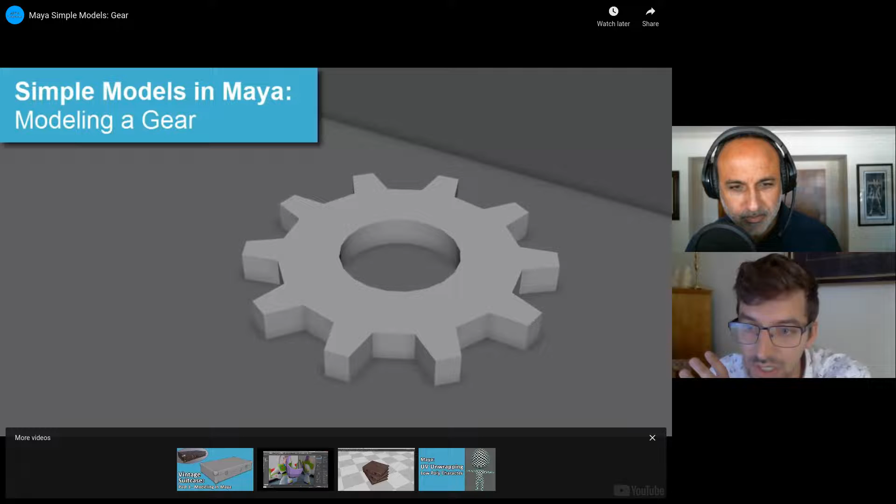Rather than opening Maya and doing that myself, this is a video online, not my video. It's a video from ARTV on YouTube. They have a nice little tutorial on how to model a gear. We don't need to watch the whole thing, it's 8 minutes long. I'm just going to skip through it so we can get an idea of how you'd do this task in a traditional modeling software.

Probably drop down a cylinder, right? You go around, and if you want to bevel it out or carve out a hole on the inside, they're taking out the inner faces, bridging it. Then to get to the actual teeth part, they're going in to control their number of divisions, shaping the inside. Here, they're choosing the size of the inside of their hole.

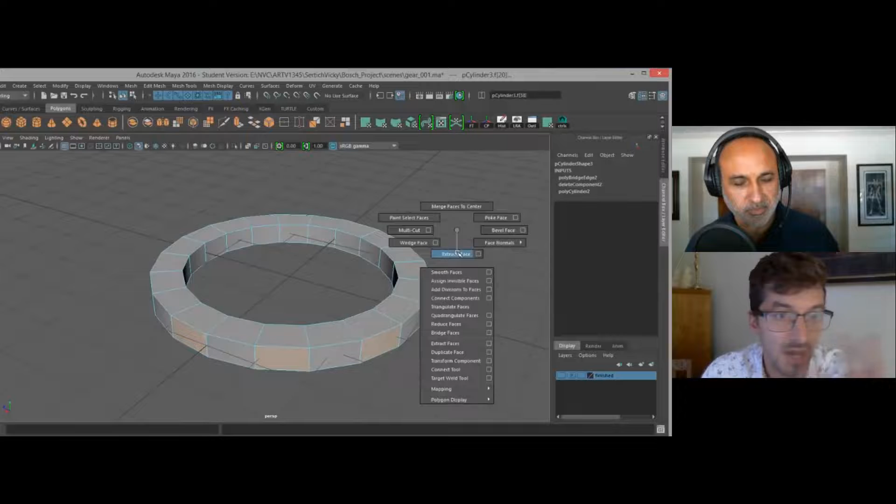Once they have that the way they like it, they go around the edge and manually select each of the faces they want to extrude out into those teeth. So they extrude those out. This is probably very familiar for everyone comfortable with Maya, but good to see because we're going to see how we can do this more easily in something like Houdini. Then you extrude all those out and maybe set a little inset on them, and then you've got your basic gear. Let's say that's all we want to create.

So let's take a look at how we would do that in Houdini now. I'm going to share my screen, let me make this full screen, here we go. Can you see this, Frank? It's coming up now, there you go. All right, cool. So let's say that we want to do basically that same shape, right?

When I hit my tab menu, it comes up on my other screen unfortunately. So normally what I'm doing here is I'm hitting tab in this space right here, and normally it would bring up a drop-down menu of options to choose nodes from. That doesn't seem to be popping up right now, so I'm just going to drop nodes. But if you get comfortable with Houdini, you'll understand pretty quickly what's happening there.

So I'm going to drop down a circle. I can, Houdini has a lot of... you know what, Frank, sorry, one second, I'm going to pause this. I'm going to switch the screens I'm sharing so that... sure, no problem.

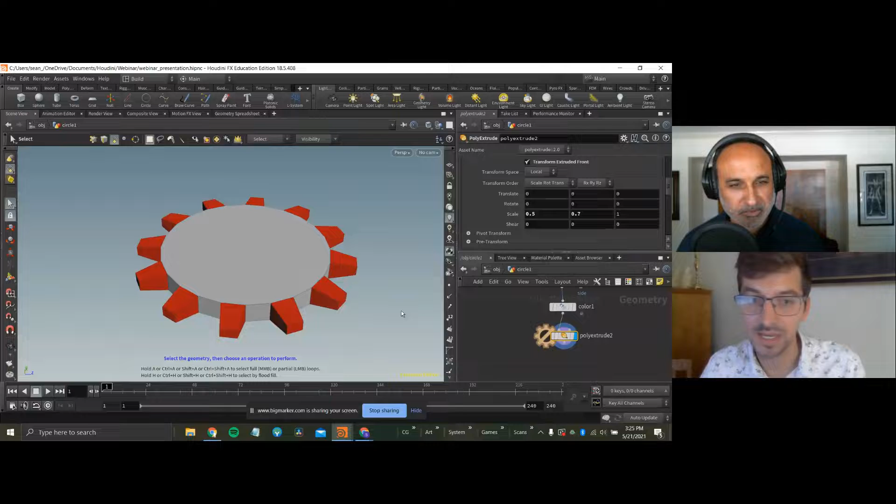So now I can drop down another Poly Extrude and extrude that group as my input there, like that. Then you have local controls to scale it down if you want to, something like that. And if we want to smooth it out a little bit, maybe I want all of these hard edges to be beveled.

We can procedurally group all of the hard edges. I'm going to put down a group node, tell it edges, and call this corners. I can tell it to group by the angle of the edge of the faces that create the edge, so I can say if it's between maybe like 70 and 90 or something like that. Let's get just the outer edges. So you can see as I adjust these sliders, it lets me control what gets selected.

Let's say I want to bevel all of that. If I put down a Poly Bevel node, it automatically filled that in because I had them selected, but I can tell it to bevel those corners and we can start to soften up edges there. I'd be painstakingly selecting every edge to bevel in Maya.

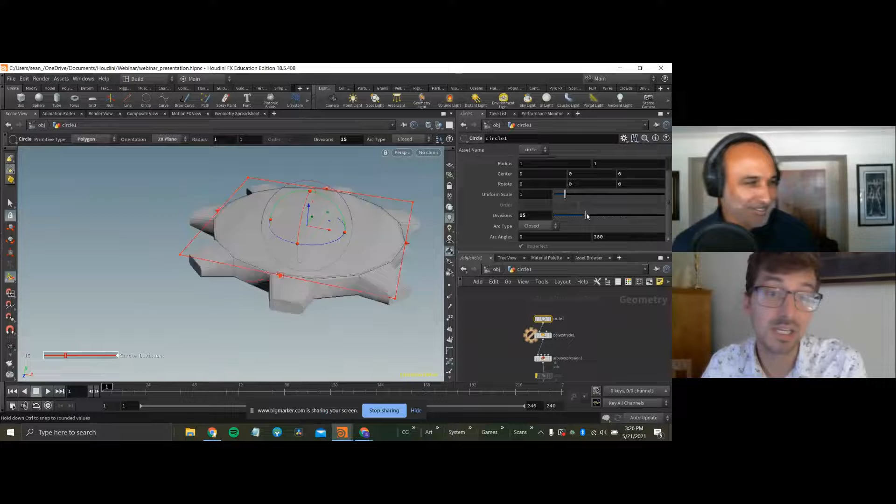What's cool again about this is at any point you can modify the number of teeth, change the scale of your source points. Normally I'd be naming all these nodes as I go along so I could keep track of what's what. You can change the size of your teeth that's being created.

And if I want to carve a hole in there, I could put down, simplest way would probably be, a tube, give it some end caps, make it really tall, and then just boolean them out. You can do another thing after this step to bevel out this boolean, but let's just do this for now. That's probably going to be too big because I need to change... there we go, I've got a hole cut in it.

I could do another procedural grouping of that edge, bevel that so it's softer on the inside. I'll just copy and paste this even - anything with the hard edge, there we go, get smoothed out again. I can add more divisions to that.

Cool, so now we've got something pretty darn similar to what we had before. And something that's cool about this too is if I know this is something I want to use all the time, I can create a little control node for it. There's a node called a Null Node - it's basically just nothing, and you can edit the parameter interface of it, which means you can customize the parameters that pop up there. I'm going to put down an integer called number of teeth.

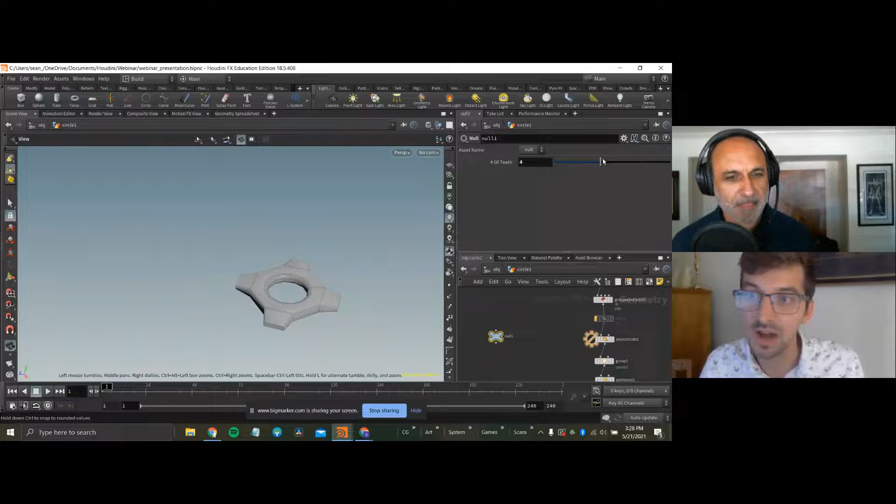I could then go over here and add all of the relevant controls that I think I would use. So I can go on my circle, I can set the base scale of it, I can set the scale of the inner circle, I'll call this outer scale. And this is the name that appears to the user, so I'm gonna give it a prettier name: outer scale, inner scale.

And then you could even add all of those bevel controls on there. Maybe let's just add one more thing: the length of the tooth extrusion.

So now directly from this single interface, I can control how many teeth I have on this gear, I can control that outer scale, I can control that inner scale, I can control the length of those teeth. And so if you need to create 50 different gears, you only need to build this setup once, and then you're just controlling your build here.

Next, I want to take a look at how we might build a little road setup, because this is kind of cool since we can scale a few things on it. With this, we're going to take a look at a couple of simple things and then a couple of slightly more advanced things as well.

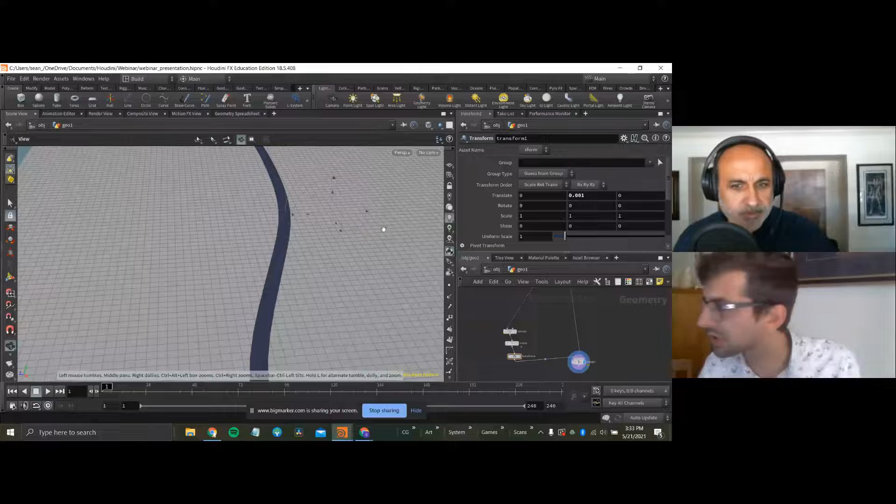So let's say that I have this curve and I want to go back and modify it. This draws it as a poly curve, but it'll be a bit easier to modify this as a NURBS curve. Okay, it's doing that because of my viewport settings here. Let me fix that... yeah, there we go.

So let's go up to our curve again. I'm actually going to resample this down even more so that we can convert it to a NURBS curve, which will be easier to do some post modifications on. So we're going to do that, and then I'm going to need one more because it needs to be a poly curve when it goes through these whole operations. But this gives me a point kind of in the middle here. So I'm going a little bit off book here, but this will be an interesting thing to see.

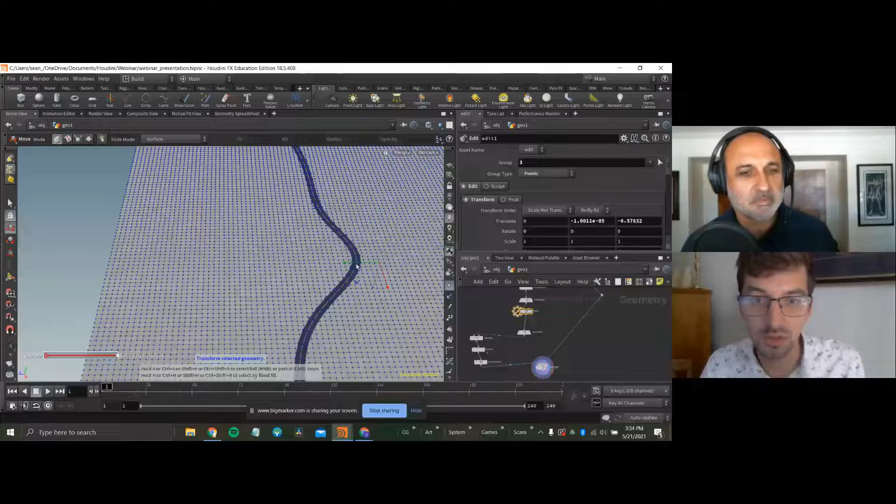So if I go down here and visualize this, and then we go up to this node—or actually maybe I'll go the other way around so we can see our points a little bit better. Now I can go here and select any of these points, shift them around, and we can see that that road just automatically gets rebuilt based on however we decide to reposition this curve here.

So let's say we like that. Let's add a little bit of extra stuff to this road. Let's say we want some street lights along the edge of it. So this is something we can automatically populate based on the curve that we used to build our road as well.

First, I'm going to build a simple little street light. Make sure I've got my pulled up here. We're just going to do a very simple version of this, but we'll do a little bit of procedural linking so you can see some of the power that we might start to use.

I'm going to drop down a tube. It's just going to be like the pole for our street light, and I'm going to set that to be about that tall. My scale is way off here—we're working very small, but I just picked a small ground plane to work with. I'm going to make my radius really small here. So we've got a pole.

I want this to always grow up out of the origin here, so it always starts from the origin. I'm just going to set its center to be half of its height so that no matter how tall I make it, it'll always sprout up from the origin there. And then we'll set it to a polygon rather than a primitive. So that's going to be the base of our pole.

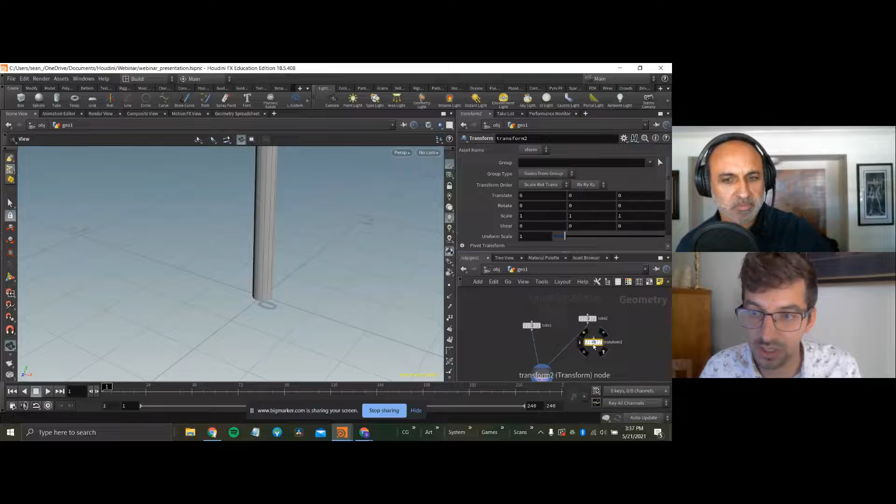I'm going to drop down a transform in between that new tube we created and that merge. I can rotate this out and start to shift it up like that. But one thing that's kind of cool, let's say I always want it to be a certain portion of the height up this tube, right? So if I go back here and adjust this height, that doesn't move at all.

One thing I can do, again just like we looked at earlier with parameter linking, I can copy this parameter and set it to be the Y translate of this value. I don't want it to be all the way at the top, let's say I always want it to be like 90% of the way up, or maybe 0.1 units down from the top of it. Now whenever I adjust that height, that travels with it.

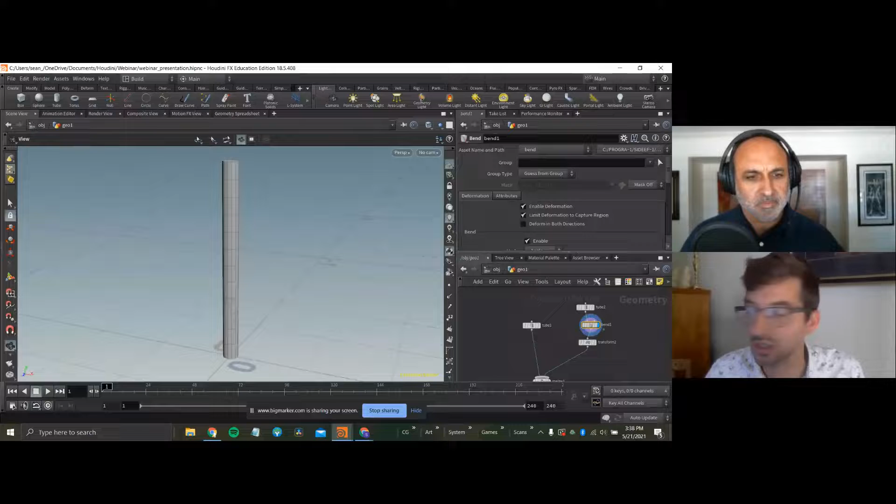I don't want this to be perfectly straight, so I'm going to add a little bit of a bend on here, and I'm going to do that before we translate it. So I'm going to put down a bend, and let's visualize this here. So what I'm going to do is set my up vector, with a couple of settings to get it the way I want. And the capture direction is going to be up, and I'm going to have this automatically. So the bend lets you set a region here that will deform whatever you're piping in there.

You can see by default the deform region is set to just a single unit, so it's much larger than what I need. This is another thing I can procedurally link to just the height of this. If you're unfamiliar with Houdini and this is completely foreign to you, the specifics don't matter. What's cool is this kind of thing: you can go in here and add a bend on there, and you can control that with a slider. So this is something, again, you could create an interface for.

So now if I go back over here - oops, I bent that the wrong way. Something like this. I can start to bend that little bit of that extrusion from that street light. I can control where that bend starts by changing where the capture region starts, so maybe I want something like that. It's kind of nice. And then I just want to add a little bit of a squashed sphere at the end here to finish out my streetlight.

So I'm going to put down a sphere, and I want this to be fully procedural too. Let's say I want this to be something I can reuse, and I can completely change these parameters, and everything will automatically be linked together. So what I'm going to do is create a sphere, set it to be a polygon mesh, change my settings a little bit here, something like that. Scale it down so it matches that tiny scale of the others - we'll pretend this is a little train set diorama or something, so it's very small. I don't need as much resolution, something like that's fine.

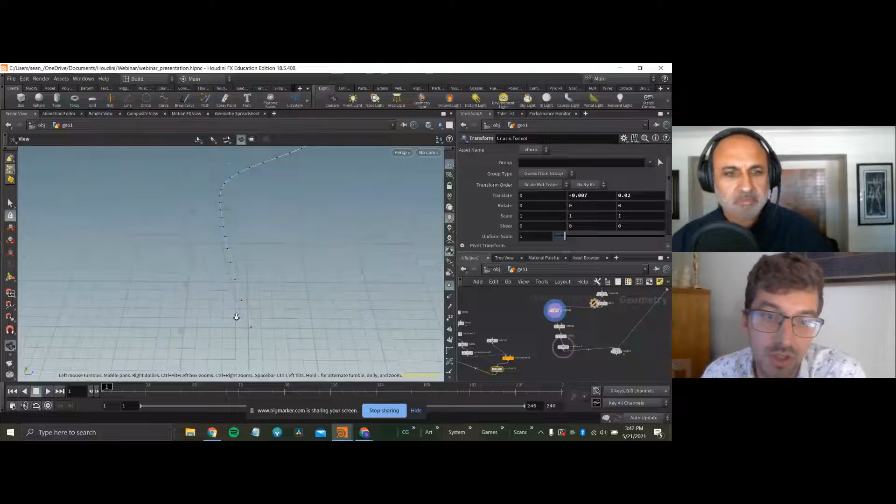So I want another curve. I want this curve to kind of match the edge of this road that we made. So I'm just going to do a couple things really quick. These are the kind of things that we would learn over the course of the class, but I am going to use attributes to figure out the orientation of this curve and then move points using those attributes.

So I'm going to put down this node called orientation along curve. Attributes are a really powerful part of Houdini. They kind of carry data about the points and primitives and everything that you're modifying. And they really are powerful for creating procedural workflows for things.

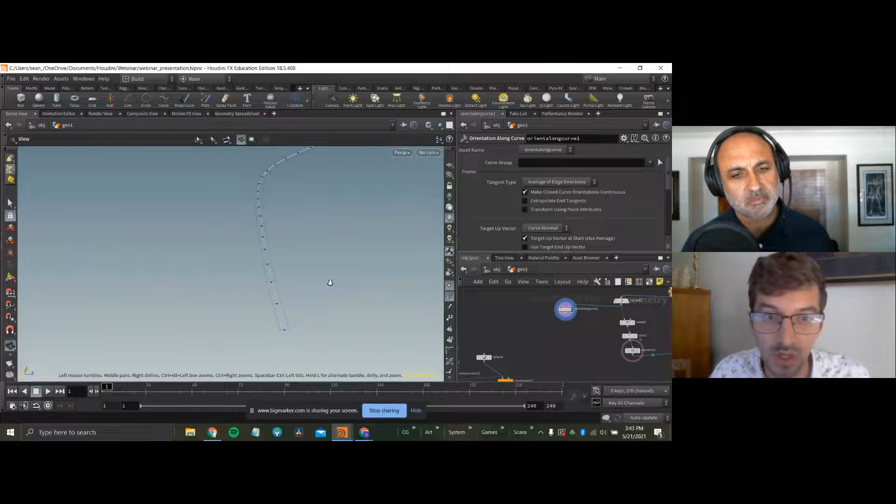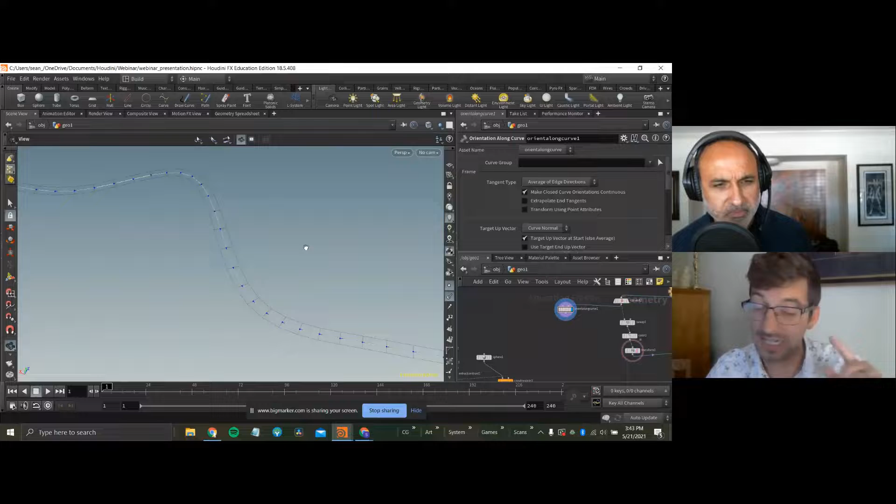So one thing, I'm adding normals on here using this. That's one big flag that when people move over to Houdini from Maya, normals don't operate the same way in Houdini as they do in other software. Normals are kind of arbitrary, basically a point vector that you can use to define whatever you want. So if you're hearing that this is a point normal and thinking that doesn't make sense, that's not how normals work - technically you're right, but Houdini doesn't care.

So I'm going to just use this. You can choose which - what this orientation along curve does is it looks at the way the curve is facing and figures out, it sets basically 3 axes. It does one pointing the direction of the curve, pointing what it assumes is the up of the curve, and then pointing out from the curve. So I want to get the one that's pointing out from the curve.

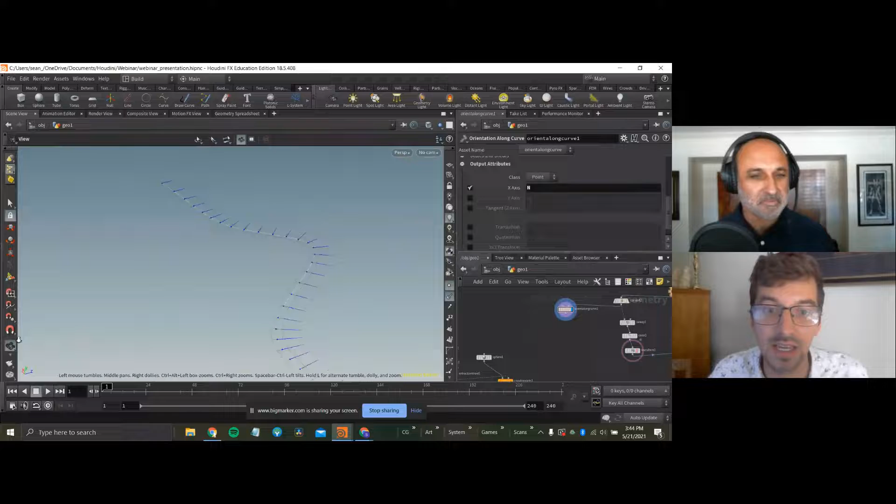And here, let me make my point normals longer so you can see it. There we go. So now you can see I've got a vector that is pointing to the side of the curve and follows the flow of the curve.

And then I can use this node called peak, which just moves points along their normal. So what we're visualizing here, if this is a little confusing, we're visualizing the curve, and then I have the road templated. So this is actually what I'm working in, but you can see there's a couple flags in Houdini, and this is all stuff that's kind of basic intro to Houdini stuff.

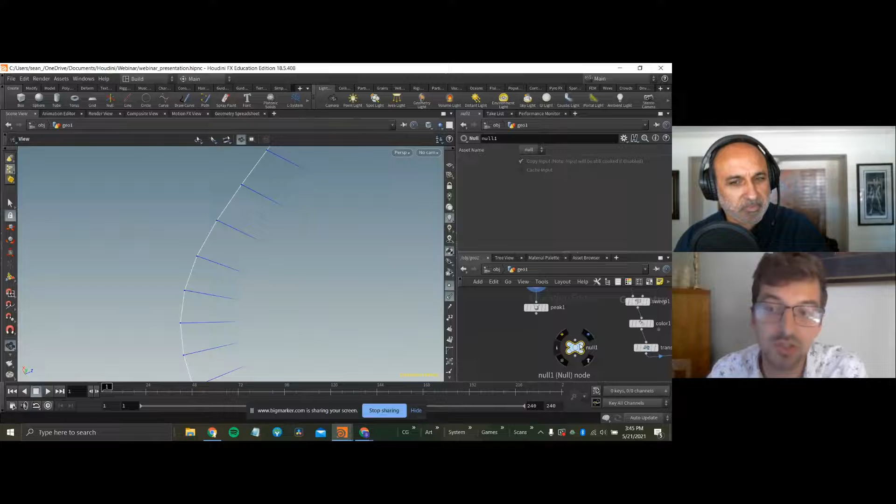So if you haven't dabbled in Houdini but you're interested, when you start to learn the interface, this will all become apparent pretty quickly. But you can see you can template, which basically wireframes something, even though it's not what you're directly working on. So I'm leaving that road templated so we can see what we want it to be, what we want to be working around, but we're actually dealing with this curve right now.

So I put down a peak node, and a peak node just shifts things along their normals, right? Like that. And so what I'm going to do is link some parameters, and I'm going to link the width of this road that I'm creating to the amount that is getting shifted there. And it's actually doing the full width, so I can divide it by 2 if I want it to be right on the edge like that.

And then in this kind of situation, I'd probably put down 1 peak node, so it's procedurally going to the edge of the road. And then I would put down another peak node to give myself a control to offset it a little bit manually.

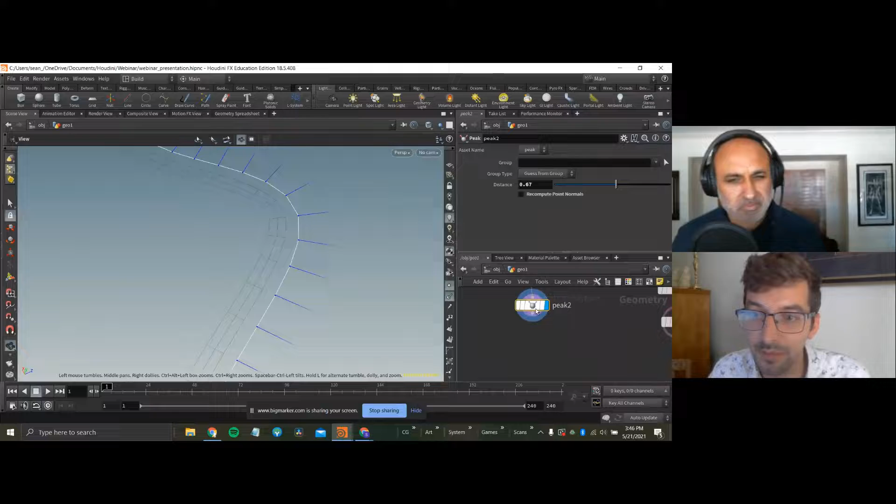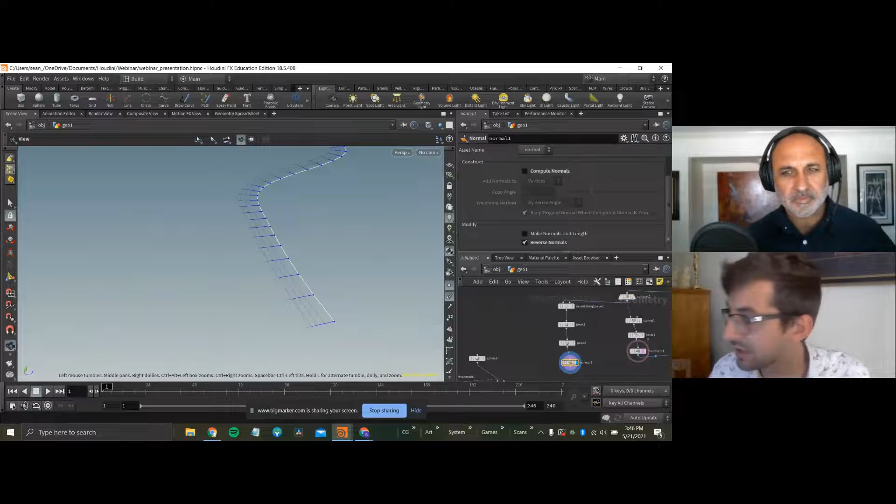So now I've got those points, I'm going to recalculate the normals, because we're going to be using that copy to points node again, and it relies on normals for how things are oriented. So I'm going to put down another normal node and reverse them, so that everything's facing in, since that's the direction we want our street lamps to be facing. Then I'll put down another copy to points node.

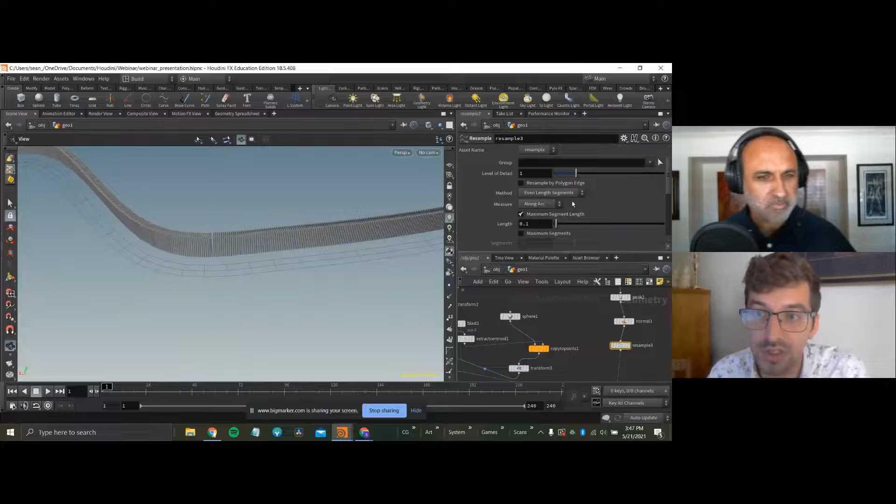And we can see that things are automatically populated along the edge. I can drop another resample in between this to resample the number of points on that curve and change the density of those street lamps.

And then just like before, if we go up here and change the shape of our curve... I shouldn't go up in Y though, if I go up in Y it's going to throw it off. But if we change the shape of our curve, we'll see that all those street lamps are automatically populated along the edge of it.

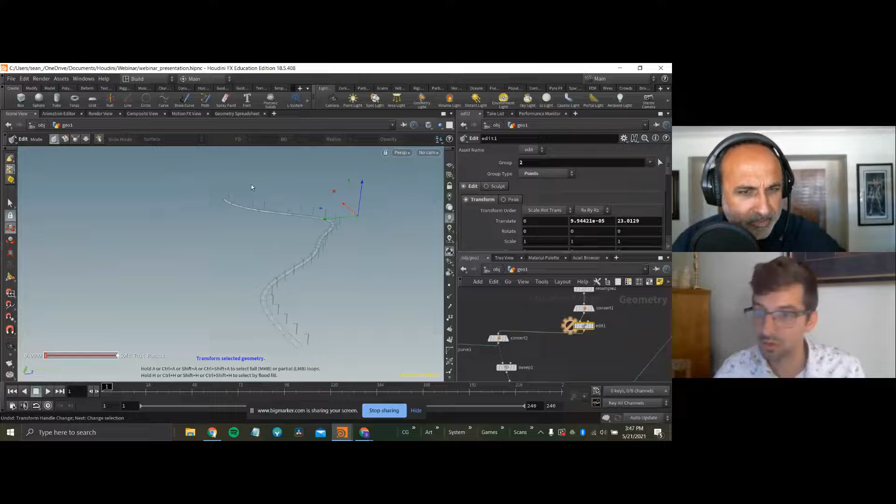It seems like the investment in time and the front loading of the functionality and options you give yourself is pretty phenomenal. It's almost like the time in modeling goes toward creating options for the future. It seems to favor a faster iteration workflow down the road. That's something producers and supervisors notice when they compare the two - there's usually not a lot of time savings in the first version of a model.

It's every iteration after that where you get significantly speedier returns on investment with proceduralism, because if someone was hand modeling this, you might get a version of a road in about the same amount of time, depending on the individual artist and their comfort with the software. But then if you get a note saying they completely changed the layout of the road, depending on the tools you have, that might be very frustrating in Maya, but here it's just as simple as rebuilding your curve.

Yeah, especially with ever-changing feedback going from artists to art directors to directors and back down the chain, it seems like this creates a lot more options for change on the fly, which would be much harder to do in a typical digital modeling program like Maya or Studio Max. And as much as Studio Max has a little bit of that functionality, I can easily see this just, once you've got all your controls built...

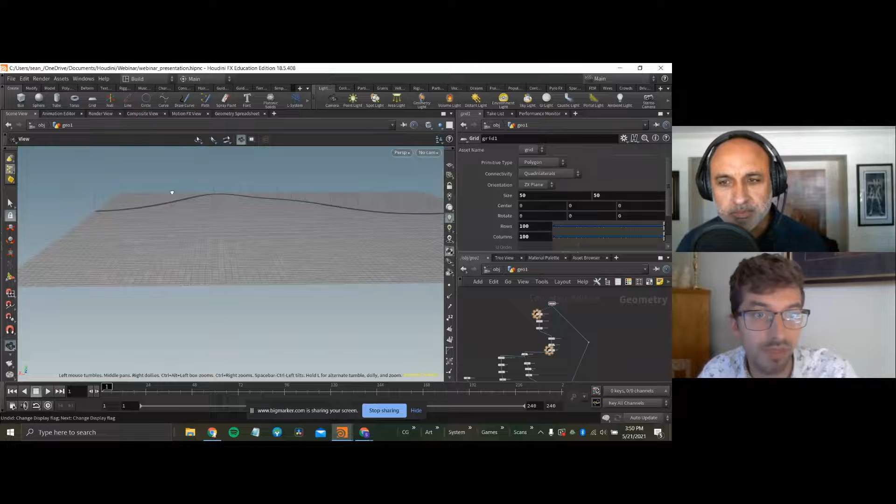I can go back at any point in my workflow, and if my terrain changes, I can reproject my curve onto that new terrain. So if they start adding hills or things that weren't there, you don't necessarily need to start from scratch - you just take that road you drew and shift it up so it aligns with the new ground plane, and everything else stays the same.

It seems like when you're first starting, there was this question - Casper B had a question.

It seems like you have a great knowledge of all the possible nodes. I guess that ramp up in terms of understanding what's underneath the hood of Houdini, is that like some of the biggest challenges? It's so powerful, but you really have to understand the capability of the node and the functions to be able to create that. In other words, that front loading, you don't know what your options are when you're a beginner. So what's a good way to practice to get to that place?

Just a lot of trial and error. It's kind of one of those things where you're not going to know what's available until you do it. Because if you hit this tab menu here, if we just look at all the nodes, you can see there's a lot here.

Even me, you know, we have our weekly live Q&A, small plug for the class, where there's an hour a week of live interactive Q&A time with the students. Even just the other day, I knew the node I wanted, I knew what it was, but I just could not find it because they didn't name it the way that my brain thought it should be named. I was like, what is the name of that node? That'll happen occasionally, and usually just a quick Google search will solve it.

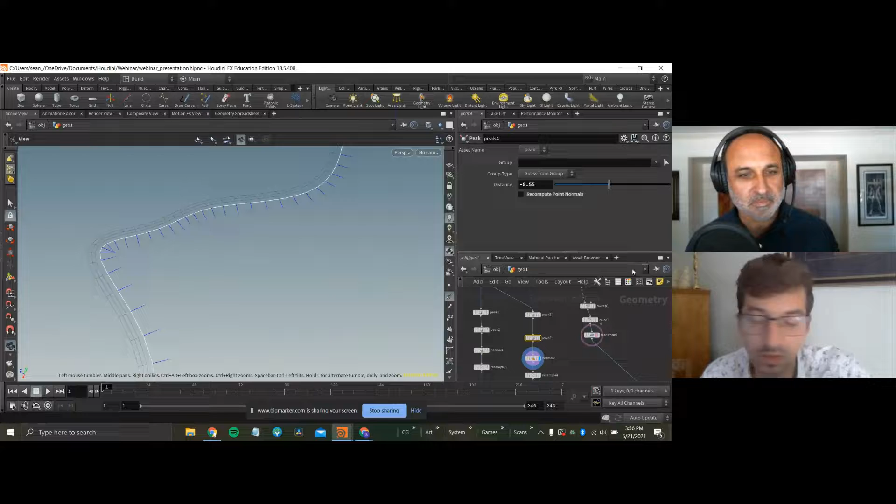So for this peak, I'm going to negate the distance that it moves. And then I'm going to make sure the peak here is a little negative as well, so it's something like that. And then let's make sure my normals are facing the way I want them to. And then we have another resample.

Okay cool, so I'm going to do exactly what we just did. We're going to do another copy to points, just copy and paste so we save a little time, and then connect this here. So this is going to look very similar to what we just did.

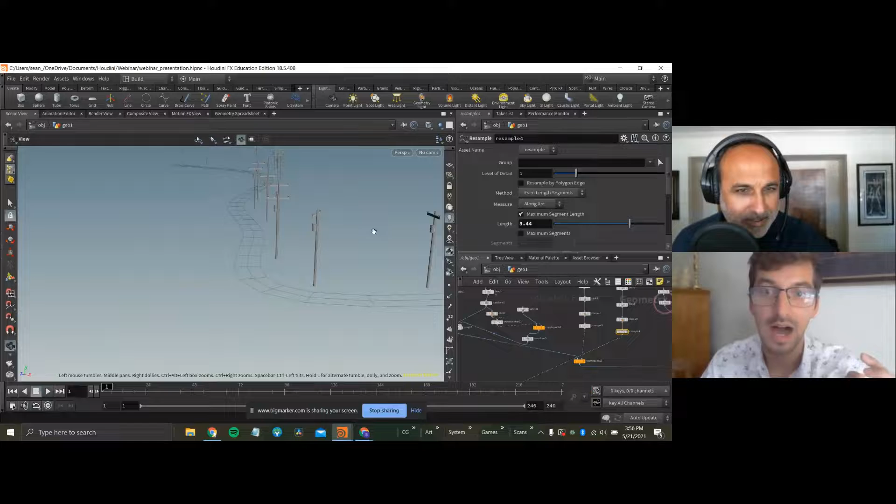But we're going to do one cool thing here. We're going to go in and procedurally build cables between each thing. The way I'm going to do that is draw a line between each of these little discs on top, and I need to tell it where on each telephone pole my start point is and where the end point is.

So I'm going to just add some points in. I kind of already set that up, and I won't walk through how. But basically all I really did is procedurally figure this out, similar to how I did the point for copying the sphere. I got the primitives I wanted to add points to, extracted the centroids of them, and then added points.

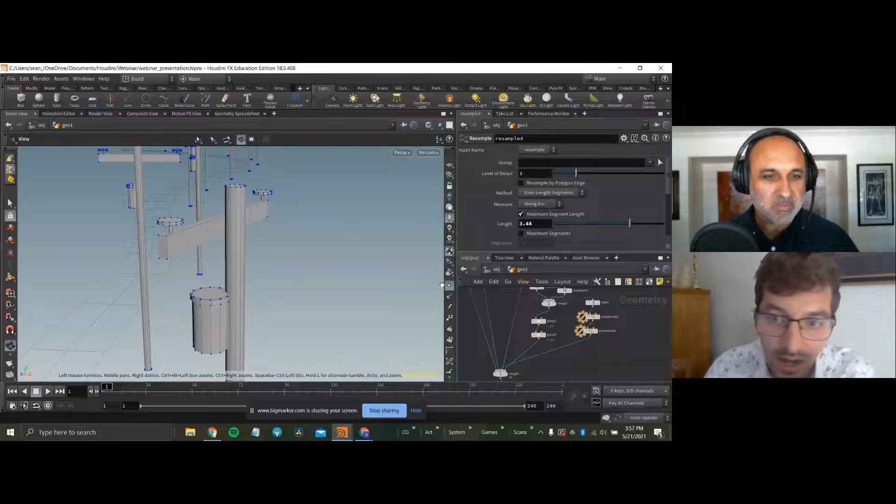But you can see, I don't know if you can see them well. Here, I'll do it here. So you can see I have these points, which are free floating points carried along with this model. And now when I copy everything, those get copied along. I also set up groups so that 2 of the points are in a group called left points and 2 are in a group called right points.

And what I'm going to do here, this one is more an example of what you can do in Houdini, not necessarily how to do it. This is just showing you, hey, isn't it cool that you can do this? I'm going to whip through this quickly just as a demonstration.

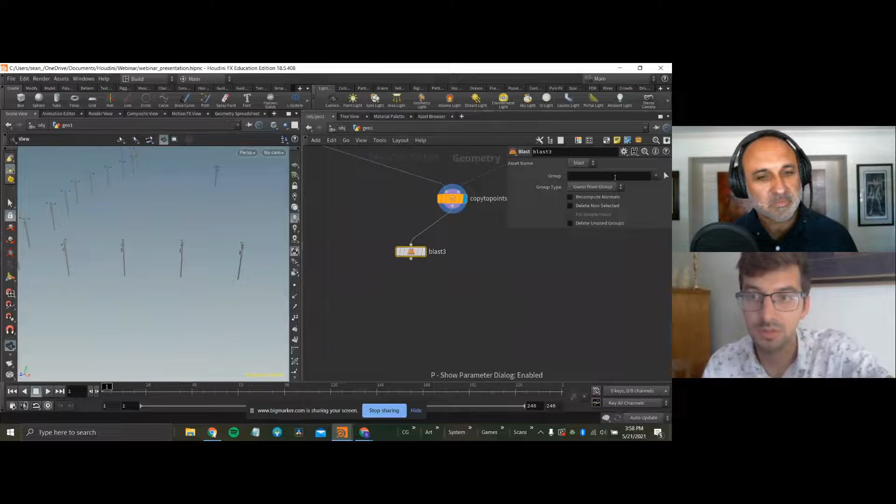So I'm going to give myself a little more screen real estate, and just start with one of those sets of points, the left points we'll say. So I can tell it, after I copy everything, I only want to... what's going on here? Yeah, 2 points. My viewport hung.

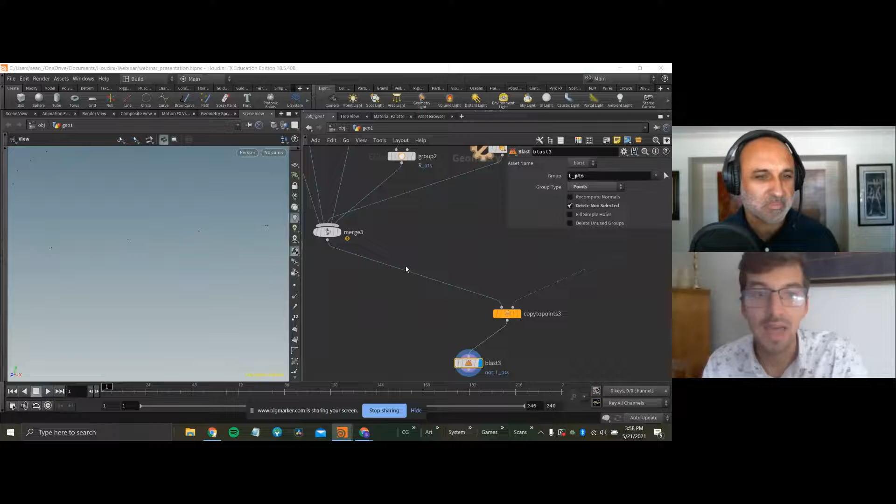Oh, delete non-selected. Sorry, I just needed to make sure I'm only deleting everything except those points. And then for each of those, what I can do is use this node called an add node.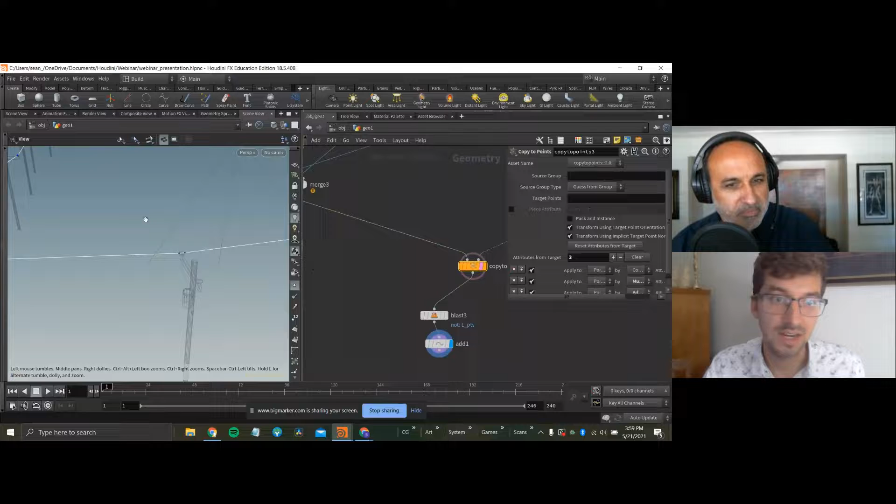This is a good example of powerful things in Houdini kind of tucked away, and you don't necessarily know about them unless you know it's a feature, because buried on this node there's an option to create a curve out of points that you input here. I don't want to connect everything, I don't want a cable on the small pieces, right, because that's where the disk is. So instead of every single piece, I'm going to say group of endpoints, group of every 2 points.

And this isn't quite what I want because it's starting from that first point. If I look up here at my point numbers, starting from the other side, I can see I have 0 and 1 here. I'm never going to connect anything to 0 because there's nothing on this side of it.

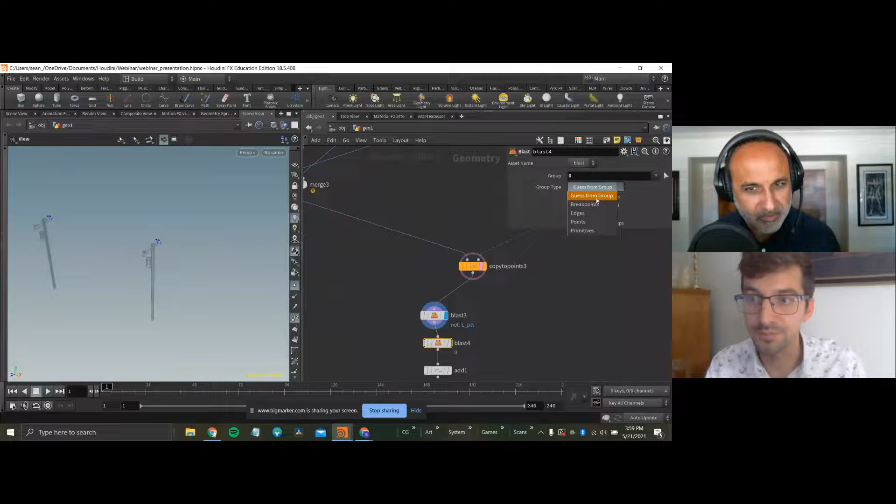So I'm just going to drop down another blast node. Delete that point, make sure we get rid of that. And now if I connect them, each of them has a curve between them. This obviously isn't super interesting though.

So let's add some droop to it. Right now, each of these is a unique curve that has a start and end point, but they only have 2 points, just that start and end. So I'm going to drop down a resample just to give it a little bit more resolution. And then I'm going to use a point VOP, which is a little bit more advanced if you're not super comfortable with Houdini, but we'll show what you can do.

I want to modify the Y position of this curve based on how far along the curve it is. So I need a value for each curve. I basically want this to get an attribute value of 0 and this to get an attribute value of 1, and everything else interpolated in between.

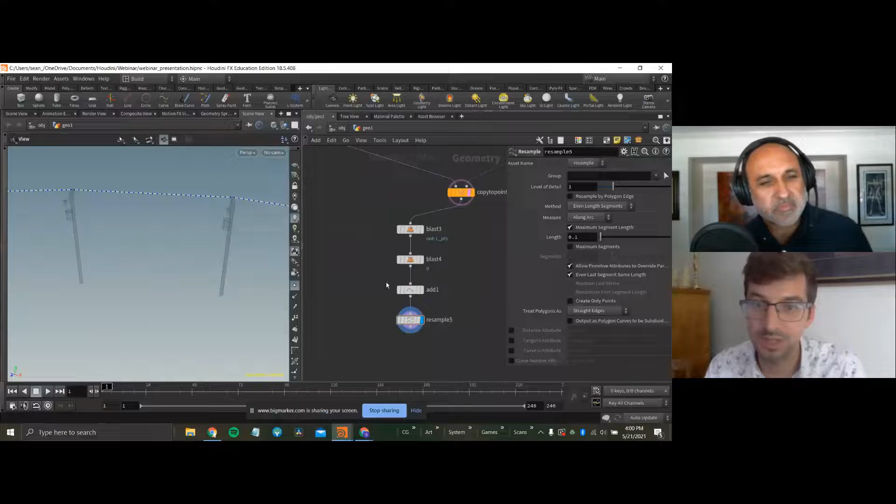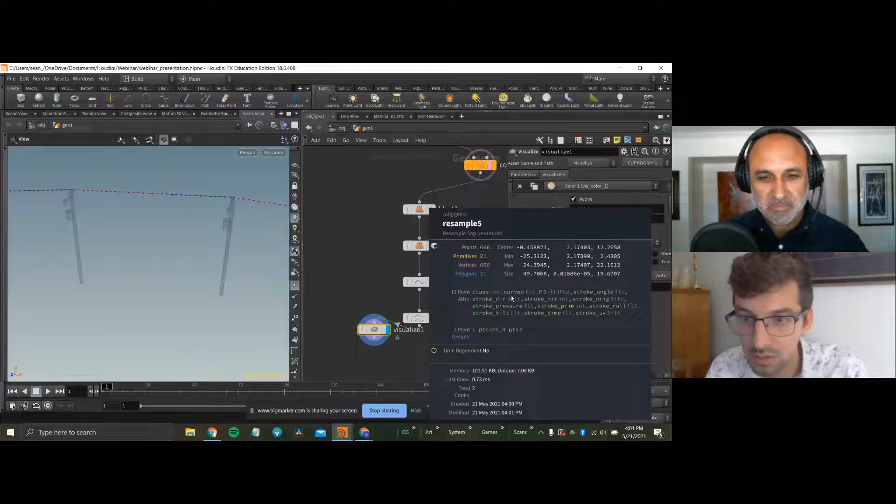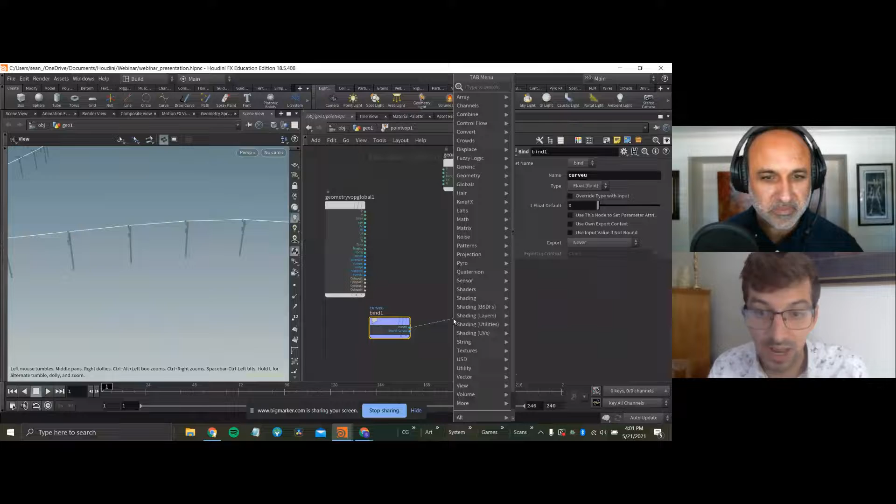And now I'm going to put down a point VOP, and using that attribute I just made, let's put it into a ramp so that we can artistically control what that looks like. And then we're going to create another parameter here that's going to control the amplitude of this.

And again, I apologize, I'm kind of whipping through this. This is just meant to be an example of some of the things that you can start to create once you're more familiar with some of the more advanced workflows here.

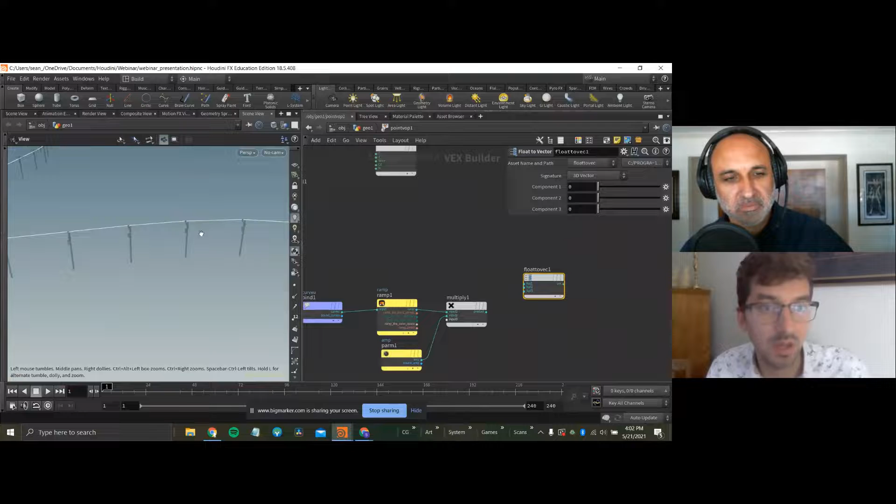So what I'm going to do here is I'm doing a ramp that's going to control what the shape of the droop is. A multiplier is going to control how deep that droop is. And I want to make sure it's only affecting the Y position of these curves.

So I'm going to pipe that into a vector, but only in the Y. And then I'm going to subtract that from the position so that the Y value gets subtracted from all of the positions here.

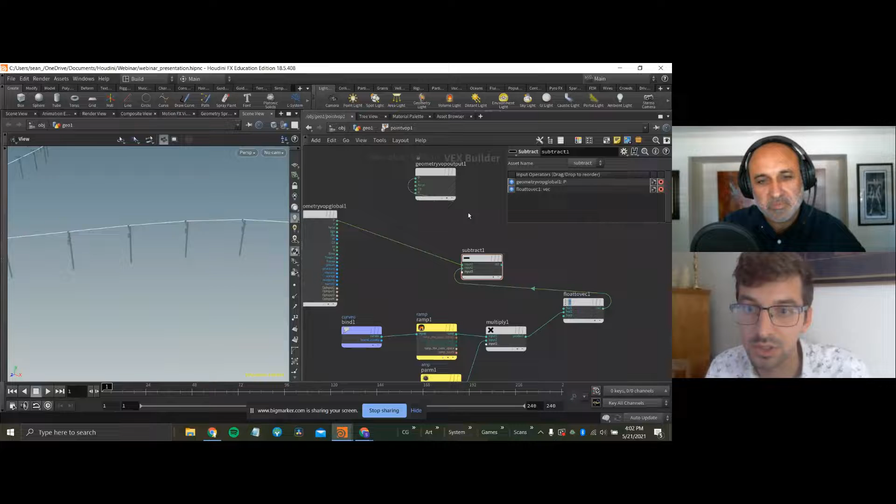And so now I can go here and I have this ramp here that's not currently doing anything, but let me set this to B-spline, and did I output that to the right? Oh, and then the amplitude is at 0. There we go. So now I have this control here that controls the depth of that droop.

And then I can also artistically control how I want that droop to look. By default, you could just do something like this, give it a nice natural look. But if you wanted it to be tighter on the sides or something like that, you've got a control right here to go ahead and control that.

And then we can just do a simple polywire to give that a little bit of actual geometry there, something like that. It's probably too thick, something like that. And then of course we could go through and do the same thing on the other side as well, but let's assume that we just like this one.

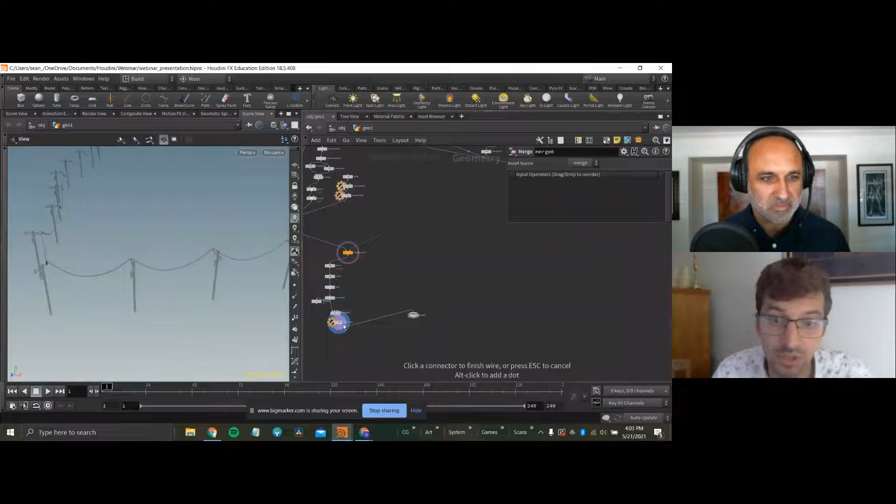Again, just to demonstrate, and we've seen it a couple of times now, but this is the super cool part of the process: this is now just automatically done no matter how you modify your curves. So we have telephone poles being automatically generated with the cables being generated between them.

And then you also have streetlights, and then, oh, I need to stop moving in Y. And then you have your road being created. This is all, you know, just once you have this done, you just have a setup to create this stuff. There's no limits on the kind of road that you create at this point.

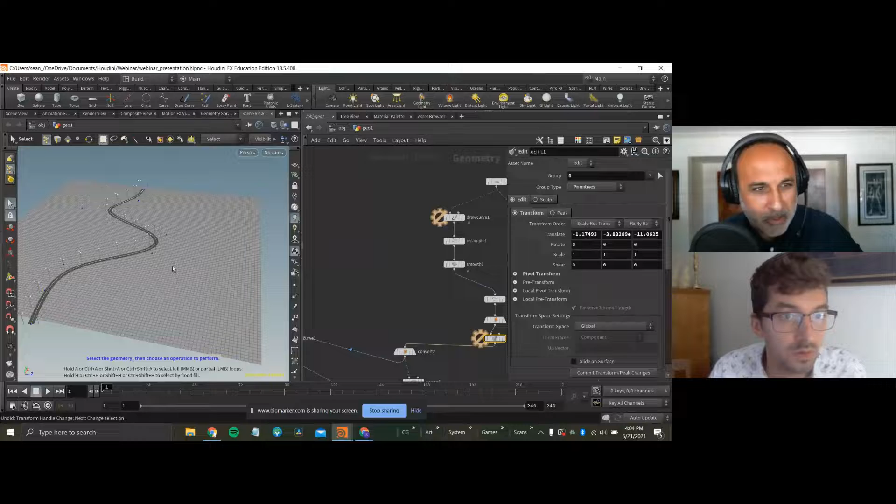Yeah, and that other cable probably just goes on pretty easy because you did it the first time. So it's like, yeah, that would be an offset, it seems like, or some...

Yeah, well actually, what we can do, I can actually do it. It's a very quick addition just to demonstrate, because each of these will have their own attributes. You can actually pipe them into the same workflow here. So what I'm going to do is the same thing, copy it, but instead of isolating the left points, I'm going to isolate the right points. And then before that resample, I can just merge that in. And bam, I've got my other set right there.

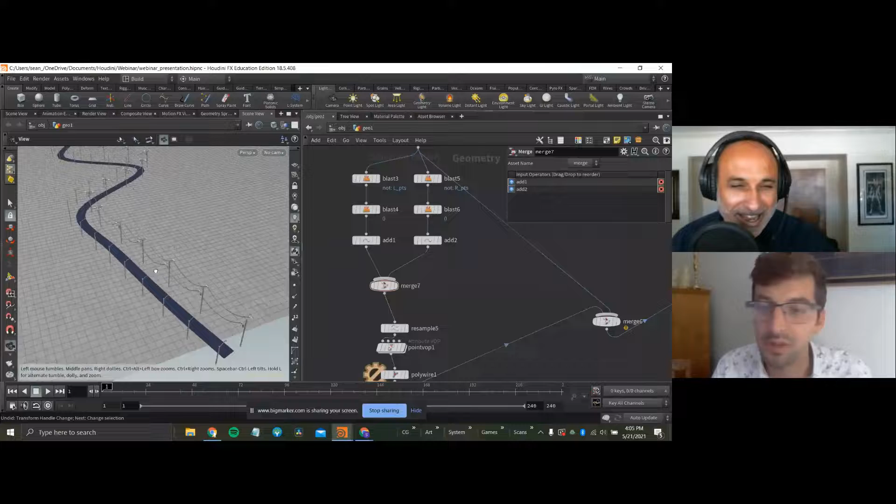And then the only other thing I'd want to do is get rid of the little white dots there - those are just my extra free floating points. I only added those to be able to connect these wires, so I want to make sure I'm getting rid of those. Did I do that right? Should be doing it.

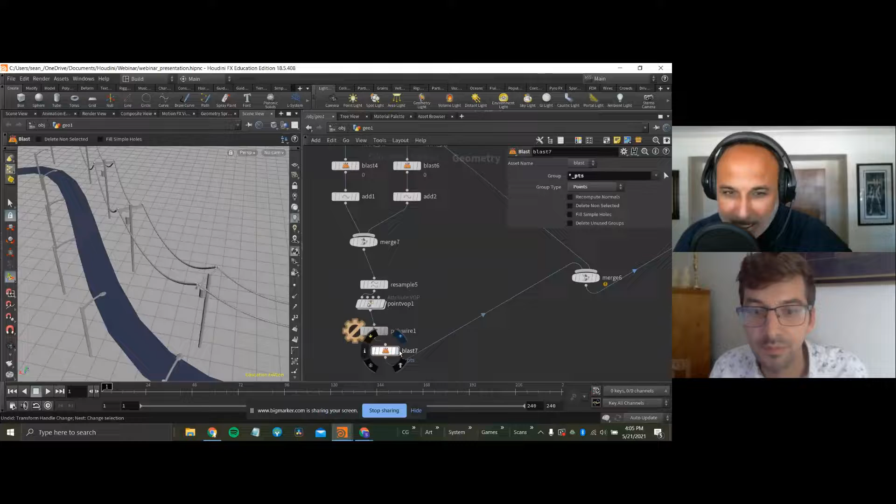Yeah, that's like Houdini - it's the equivalent of a supercharged race car going 0 to 60, and the guy's still at the starting line. On that level of power and functionality, Houdini is definitely just, yeah, we could do this. I just imagine the amount of time it would have taken to do something similar in another package. And as much as I love some of the attributes of the other packages, this is another league of being able to do this kind of work.

So we've been getting some questions along the way. I don't know if this is a good time for them. Yeah, no, that's kind of everything I had in software planned.

One thing before we jump into that, to piggyback off what you just said - that exact reason is actually one of the reasons this is also very heavily used in environmental work, which has been a lot of my exposure to it. And that's because if you think about it, not just per scene or per shot, but across a whole sequence or show or movie - if you have a show with a lot of highways and city streets, you only need to build this rule set once. Then for every single shot with streets in it, you just pipe in a curve and the work is done. So it's not just about how big a set you can make with it, it's how many different sets you can reuse this for.

And that's where this becomes very appealing for producers and people who want to shave off time and money - you can create a single rule set that gets the look they want. And you still have those controls so that it's like, oh, in this shot we need the wires to droop a little less because they go underneath something. And then bam, you've got the control right there. But you get like 90% of the way there right out of the gate.

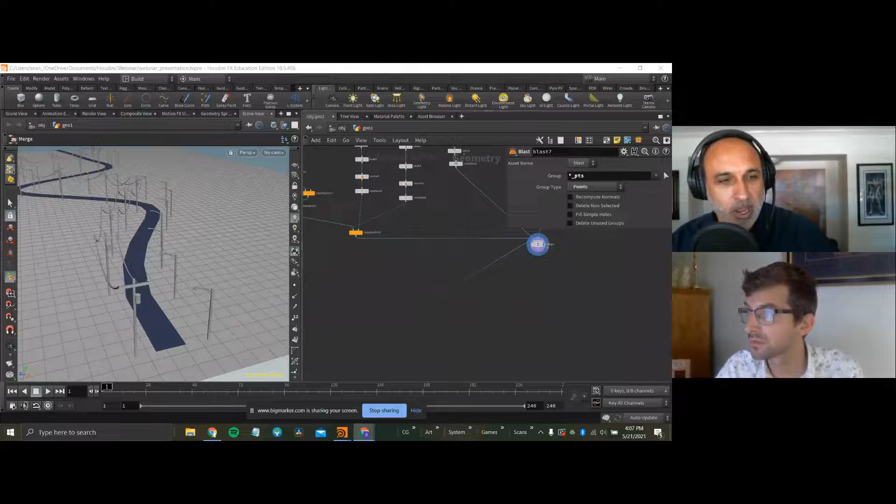Cool, well I think this is just amazing. I think it's been really great to see this demonstration. I wouldn't have been able to do - maybe I would have had a chance at modeling the light fixture, might have done the road, but once I was done and doing the changes afterwards, I would have been left in the dust.

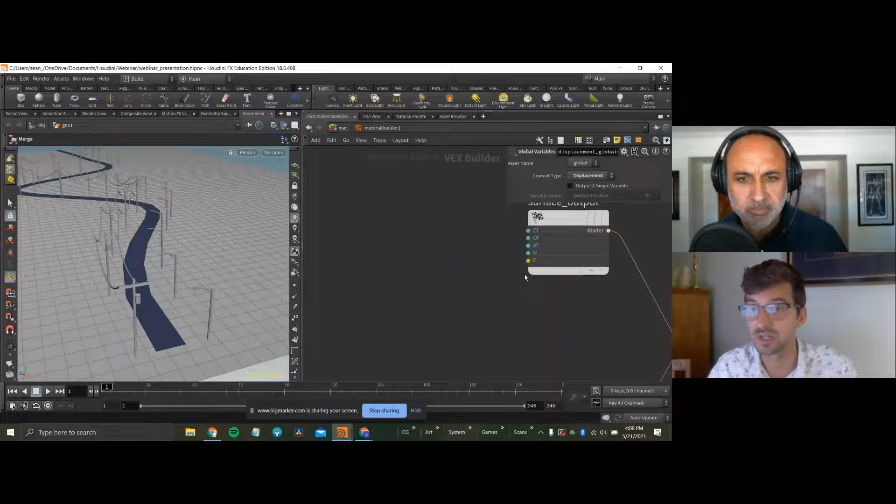Any context you're in, Houdini tries its best to create similar feeling environments. So this is the material context. If I put down a material builder here, we can dive inside that. You'll see this looks pretty similar to what we were doing with that VOP stuff, but this is a completely different context. This is for generating materials. You can see it's got your diffuse, your opacity, things like that. It's very powerful in terms of integrating with Houdini, especially because a lot of the things you can procedurally do in the SOP context, you can also procedurally do in the material context.

You can also tie those two things together very easily. You can send attributes that you're setting up in the geometry creation, and know I'm going to rely on that when I'm setting up my procedural material. I've done a little bit of, I don't know Unreal super well, so I can't do a direct one-to-one comparison.

I haven't seen too many studios that use Houdini's built-in renderers as their primary renderer. People will use Mantra a lot for effects, for just rendering effects work, because it ties in very well with that. Although Redshift is becoming very popular for that now too. So that's not a definitive answer. I think yes, but with the caveat that it's also not necessarily being done super widely in the industry, I think, to use Mantra.

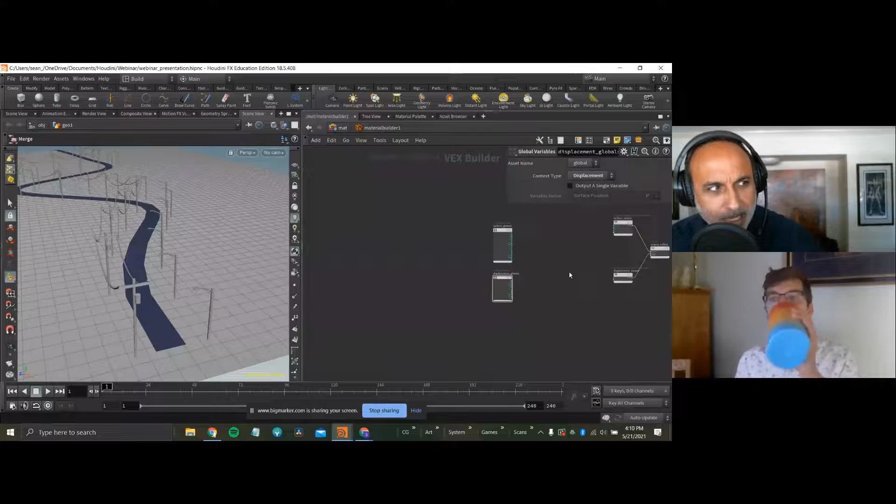Cool, thank you for answering that. I'm going to start - I have some questions I'll throw into the Q&A mix too. They're a mix of some technical, but then also some of your background. I'm sure some of us would love to hear about your big break into the entertainment production industry. What was that like for you? What was your first, like, holy smokes, I'm doing this moment?

Yeah, it was a few different stages of it. The first thing I got out of school was an internship with Side Effects, which is the company that makes Houdini. The first thing that I made that was seen by people and I got very excited about was an explosion, like a gas station explosion I did for their Houdini 12 launch video. That was really cool because it was like, watching the Vimeo video, but look at all the people that watch this.

And then while I was there, I did a little bit of freelance work for a commercial. So that was the first thing that was being sent out to the world and not just living online. And then pretty shortly after that was where I got my first job at Reel FX. That was super cool.

It was like the first project there was not anything that was anything to write home about, but it was just very cool knowing a huge amount of people are going to go see this. I'm glad it wasn't a higher profile project because you learn a lot over your first couple projects. So it was kind of nice cutting my teeth on something a little bit more lower profile. But yeah, it was also fun. I remember that first project, because it was a bit smaller, the stakes were lower. It wasn't Star Wars, it was just a random animated film.

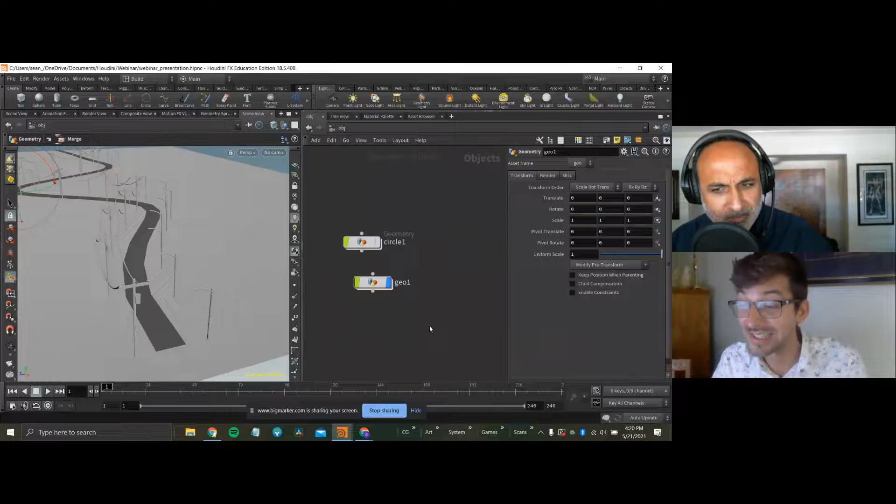Yeah, we can dive into it. I'll say that anything I didn't plan ahead of time might get a little sloppy. We saw that pretty early on when I deviated from my gear setup. A lot of my process is very exploratory, I'll generally know what I want to do, but I'll make some mistakes, and then I'll only show people what I found out was the right solution. But let's dive in here real quick.

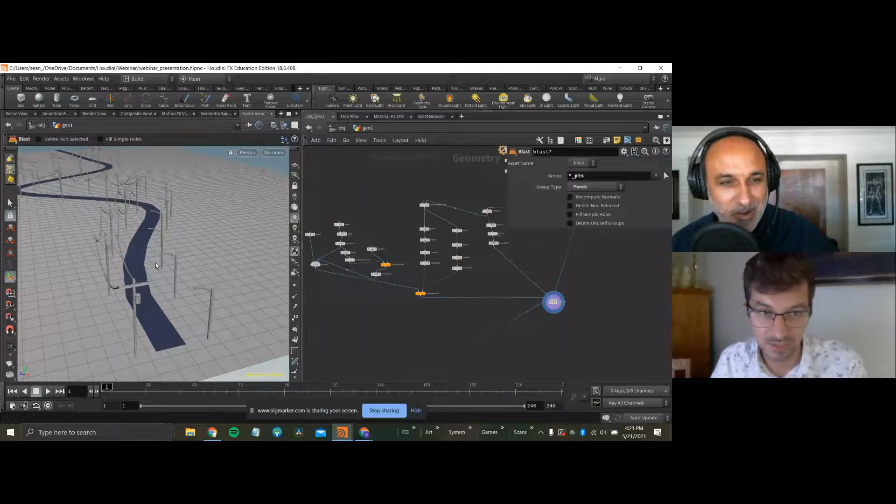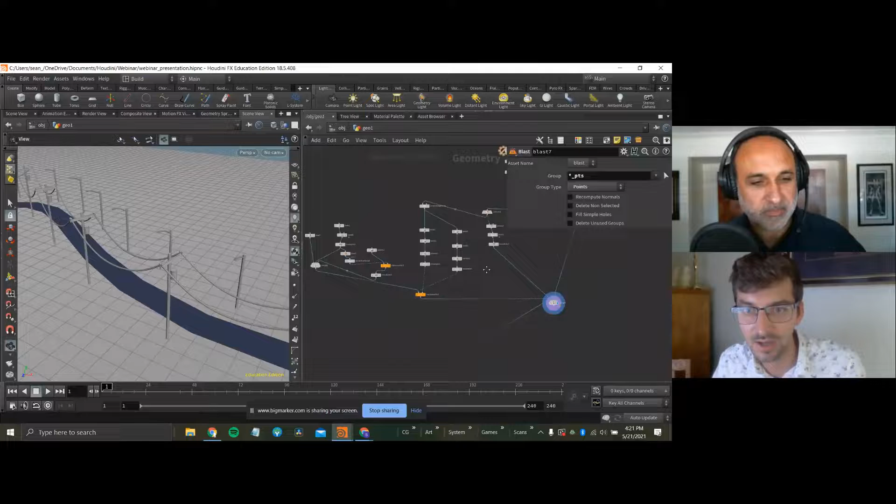The neat thing about doing something like this is the orientation here is entirely controlled by those point attributes. That normal we created is controlling the direction the light is facing. So if we modify the point position but don't modify its normal, we can move that point wherever we want and not reorient it. We did see it flip-flopping earlier because I was manually dragging the curve around, which was throwing some things off, but I think that's because of where my normal calculations were.

Let's go here, let's try that and see if I can get it to work. So let's just take this up in Y. And so now everything's wonking out.

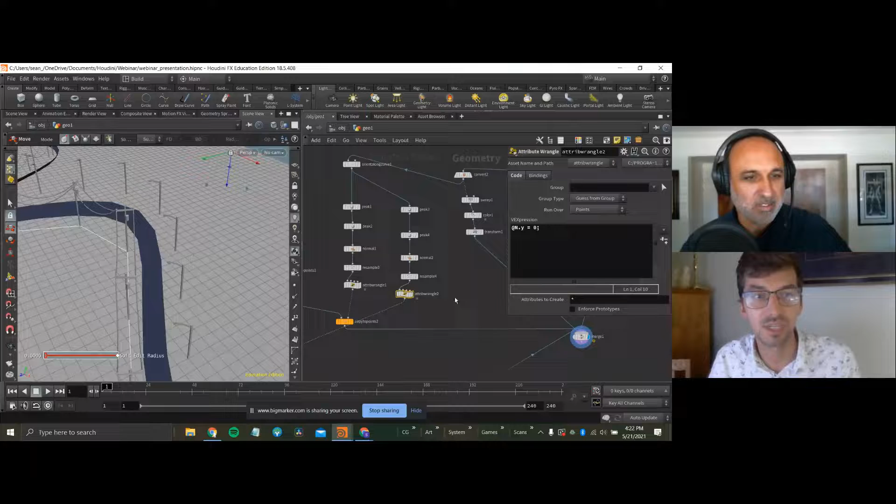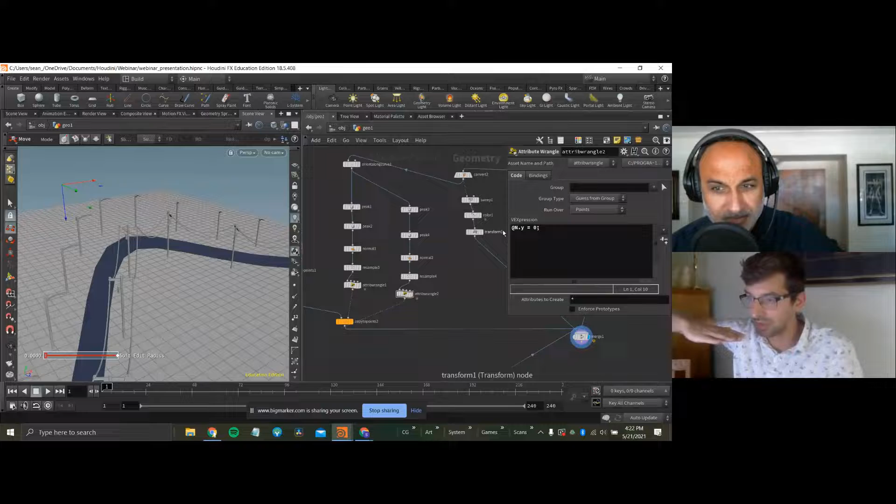So actually what I can do, I think an easy fix for this is to just go here before my copy to points, and I can just manually override my normal to always be, what would that be, 0 in Y. So here we go, I can manually override that and say hey, actually don't tilt it at all in Y. I want you to update it in the other directions, but always make sure it's flat in Y, because the Y component of that vector had any value other than 0, it started tilting that normal. Now it's going to orient it based on the curve going around that, but it'll never tilt. And so that's how we can get that.

Cool, that was actually simpler to do than I even expected. Pretty awesome. Not simple for me, because I would need to get in there and learn all that, but in terms of getting into it in a couple of steps, holy smokes.

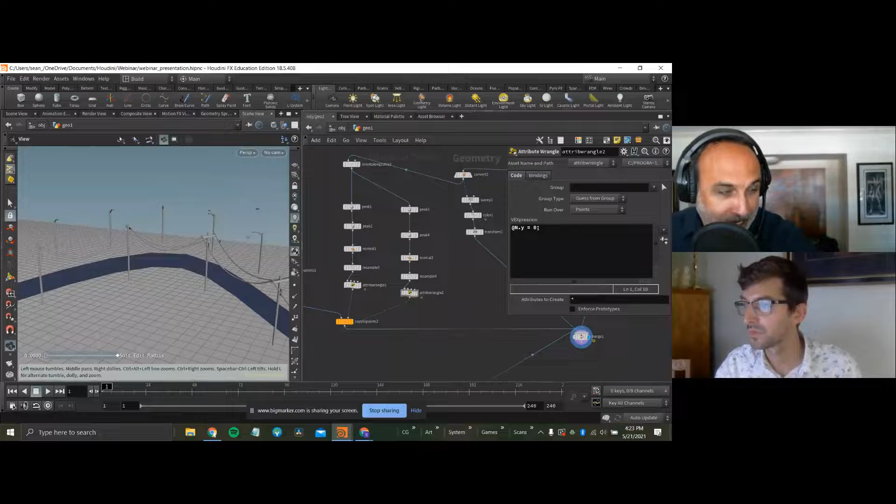I have a question for you. We're in the entertainment design business, and a lot of change can happen. There's growth spurts, and there's also times when the business can contract depending on economic forces beyond our control. Have you ever been on the downside of a studio closing, or a layoff, and how did you handle it? What are some feelings you had hearing the news, and how did you recover from that? We're in a business that changes a lot, so maybe you have insight to offer, having been through a couple of experiences like that. What should someone's expectations be entering our field?

Yeah, for sure, I have been on that side of it. I'll say that probably if you're in the industry for long enough, not definitely, but there's a good chance this will happen to you. I've been almost in the crosshairs of it a few different times, and fairly recently was at a studio that got shut down. When I was at Reel FX, I left there after a few years, and I found out, I don't think it was right after I left, but later in the year when I left, they had mass layoffs there. So I had already moved on, but there were mass layoffs. They didn't shut down the studio, but they fired a whole bunch of people.

They were scaling down very, very small. There, the writing was kind of on the wall. The reason I left was partially because they shifted me out of Houdini and wanted me to start doing more procedural work in Maya, which I wasn't a fan of. But partially because work was very slow. There wasn't a lot for me to fill my time with during the day, and that was a pretty good indicator that they probably weren't going to keep everyone around for very long.